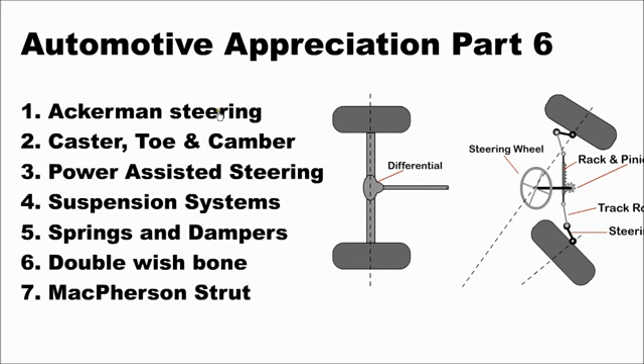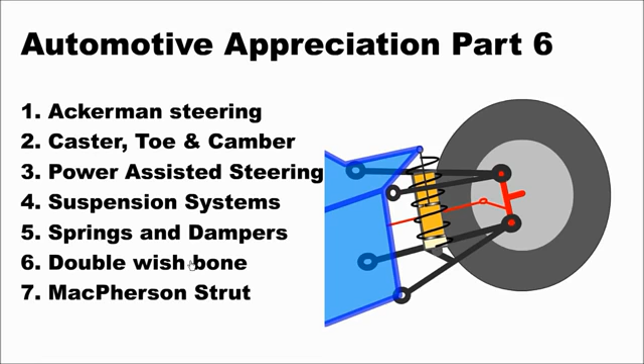In this course we cover the Ackermann steering, caster, toe and camber, power assisted steering, suspension systems, springs and dampers, double wishbone and MacPherson strut.

The Ackermann steering, designed in the 1800s by Rudolf Ackermann and still in use today, allows the outer front wheel to turn in a wider circle than the inside wheel. The steering wheel is connected to the rack and pinion, which moves the wheels via the track rods. The track rod is connected to the wheel with the steering arm.

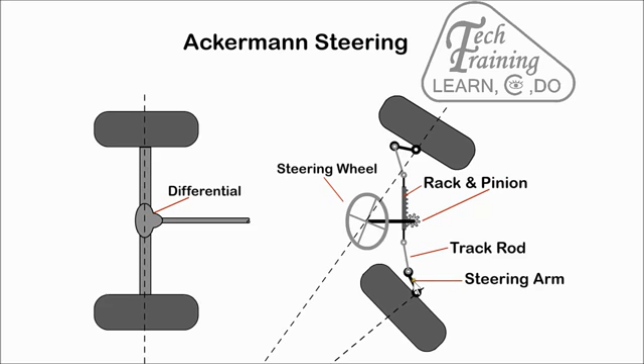A steering mechanism should be precise, provide feedback from the road, and should have a tendency to return to the straight ahead position after a turn.

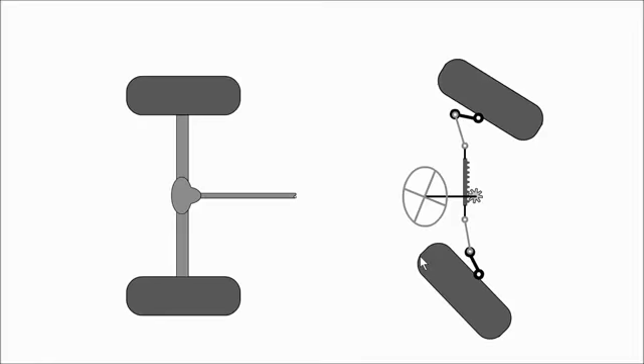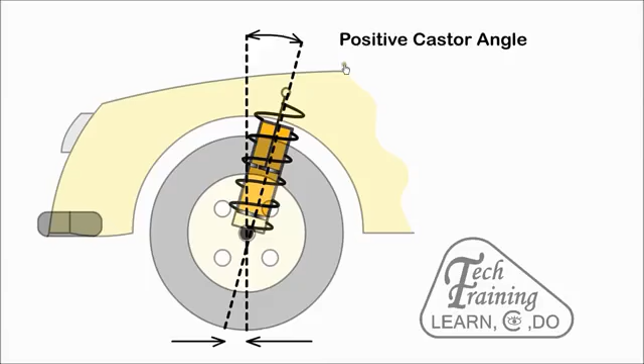Caster is the angle between a line extending through the steering pivot axis and a vertical line through the center of the wheel. When the steering pivot axis meets the road in front of the wheel contact point, it will result in an inbuilt tendency to travel in a straight line. With a tea trolley, the wheels always follow the direction in which the trolley is pushed. Most cars have positive caster.

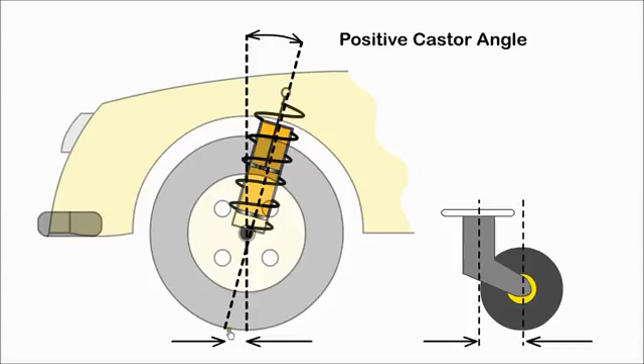When viewed from the front, the tilt of a wheel is called camber. If the wheels lean out at the top, it is called positive camber. With negative camber, the bottom of the tyre is further out than the top. This helps to improve cornering ability.

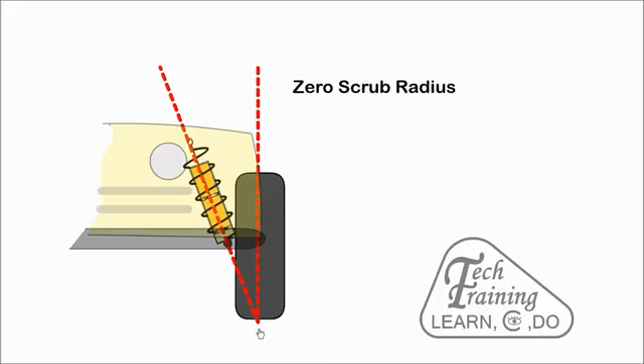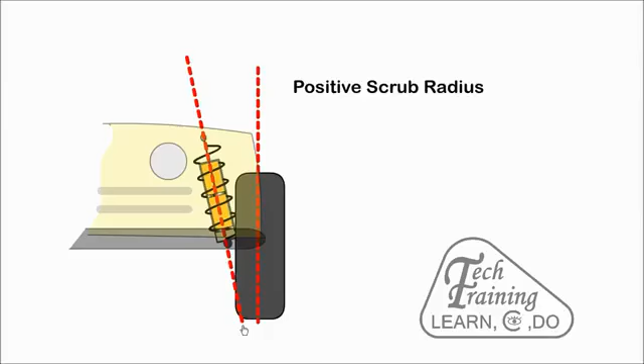Scrub radius is the distance between the steering axis road contact point and the center of the wheel. When both meet at the same axis, it is called zero scrub. When the steering axis point is towards the inside of the wheel, it is called positive scrub radius, and braking force on this wheel will tend to turn it outwards. When the steering axis point is towards the outside of the wheel, it is called negative scrub radius, and braking force on this wheel will tend to turn it in.

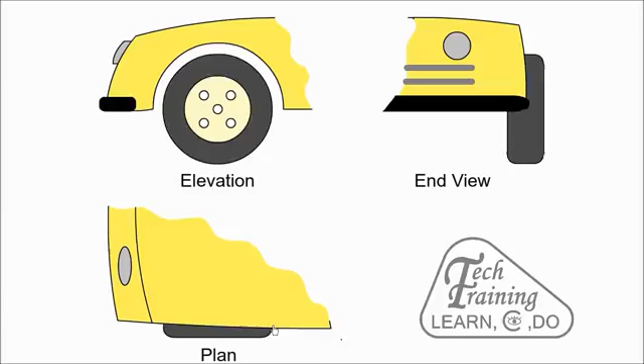Ideally, when a car is cruising on a straight road, the front wheels should be parallel. With toe in, the front of the wheels are set slightly towards each other. This is normally used on a back-wheel drive car. When the back wheels drive the car, the front wheels will tend to splay out or straighten as any slack in the steering system is taken up.

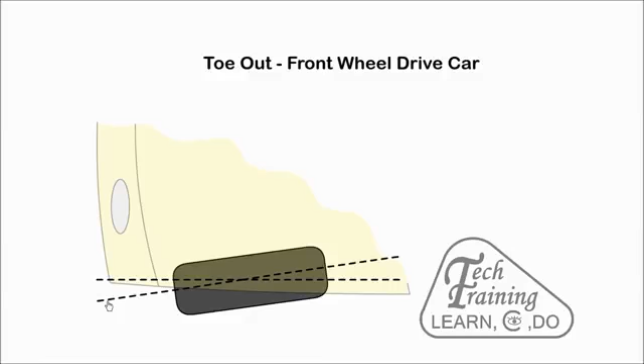With a front-wheel drive car, the wheels are set to toe out. When the engine drives the front wheels, it will tend to pull in and straighten the wheels. Correct wheel alignment ensures better fuel economy, tyres will last longer, and safer motoring.

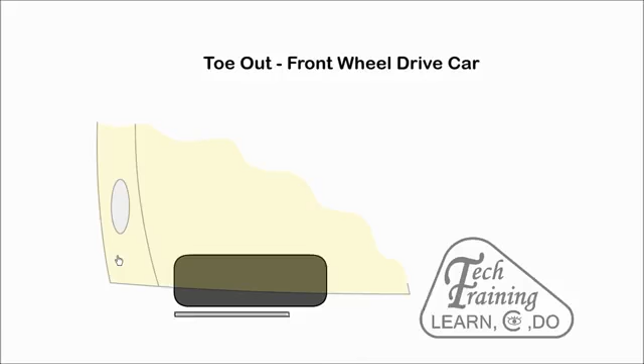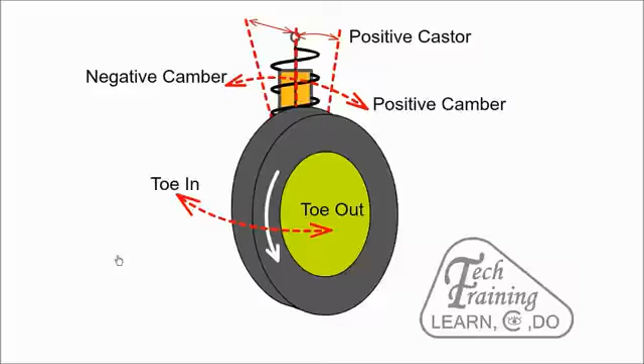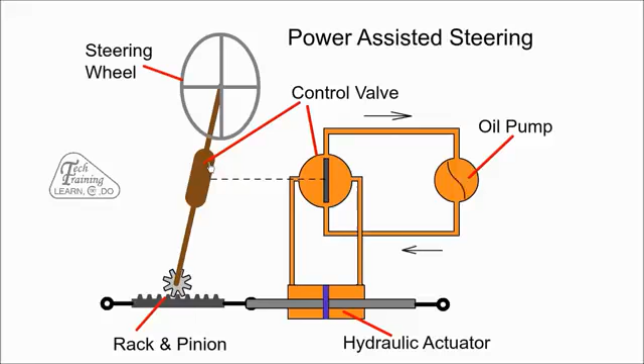With a hydraulic power steering, the hydraulic pump is driven by the engine and the power steering oil is directed to the actuator via the rotary control valve and hoses. When the steering is at rest, the fluid exerts an equal pressure on both sides of the piston.

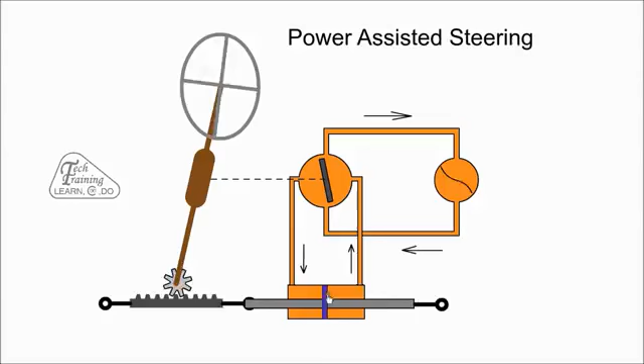When the steering wheel is turned, a torsion bar connected to a rotary valve diverts more oil to one side of the piston, providing assistance in that direction.

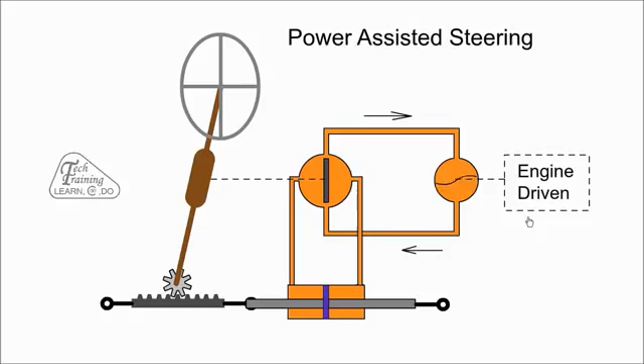Early power steering systems were belt driven by the engine, with the pump speed proportional to engine speed. Often this results in high pump speed when it is not required. It also reduces the power available for the driven wheels.

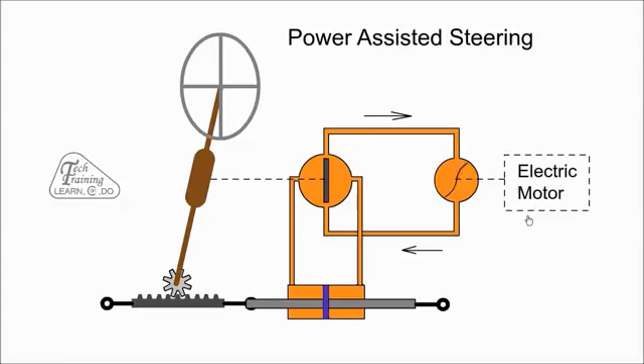With an electro-hydraulic system, an electrical motor is used to drive the hydraulic pump. When the pump is not required, the motor is switched off, saving power consumption. Another solution is a complete electric power assist system.

Electric power steering (EPS) uses an electric motor to provide assistance at low speed when the steering wheel is turned. It provides variable assist depending on vehicle speed, maximum assistance when stationary, and no assist at high speed. Since it only takes power from the battery when required, it will help improve fuel economy.

A rotation and torque sensor measure the rotation of the steering wheel and forward this data to the ECU. This information, together with road speed, determines the amount of assistance provided. On modern cars, the motor is usually connected directly to the steering column. This speed-sensitive electric system is also lighter and cheaper than the hydraulic equivalent.

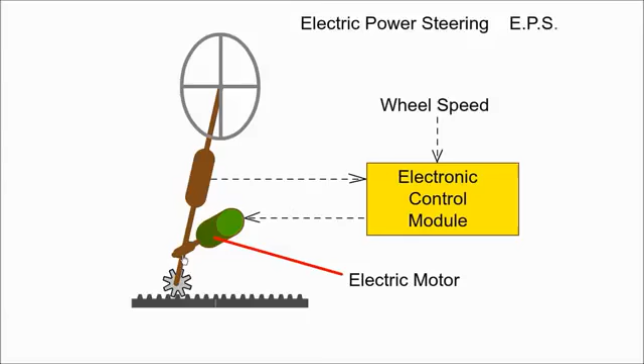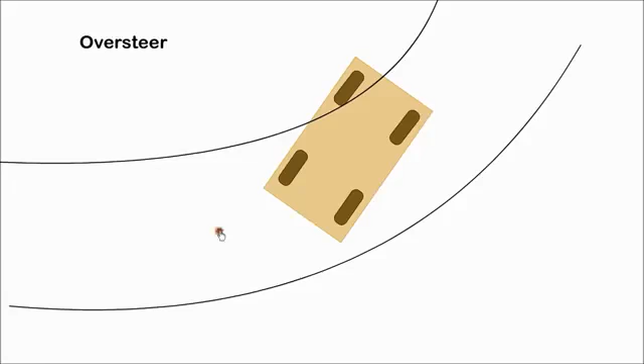Oversteer occurs when the back of the car swings out when cornering and can result in loss of control. It is corrected by reducing the steering angle. Understeering occurs when the front of the car slips out or runs wide. A small amount of understeer is more desirable than oversteer.

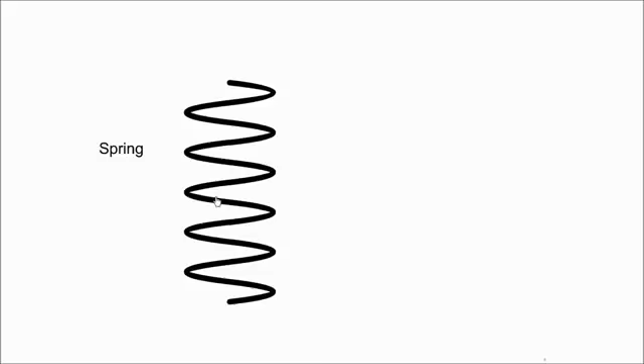Coil springs store and absorb shock energy by compressing and extending. When the wheel is pushed upwards by the bump, the spring prevents the shock from reaching the chassis and maintains the tyre in contact with the road.

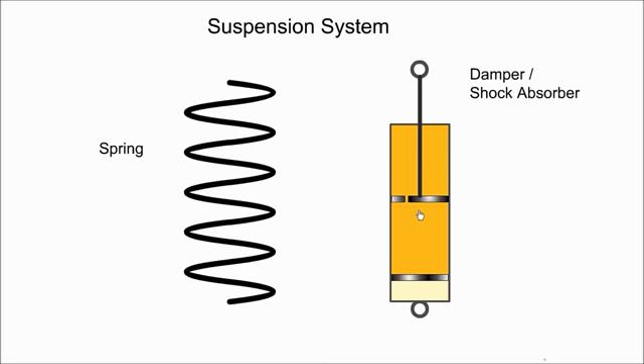A damper converts the oscillations of the spring to thermal energy. The damper is filled with oil. When the car hits a bump, the oil is forced through a small orifice, thus slowing down and damping the movement of the piston.

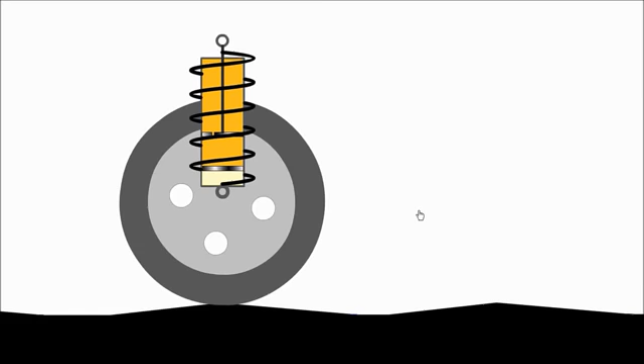The suspension consists of springs, linkages and dampers and connects the car with the road surface through the wheels and tyres. It provides comfort for the occupants and helps maintain the wheels in good contact with the road, providing traction, maintaining stability and reducing stopping distance.

A twin-tube damper has an inner and outer tube. The piston moves in the inner tube and hydraulic fluid is displaced to the outer tube. The restricted flow through the orifice slows down and controls the movement of the piston. Compressed air or nitrogen allows for the additional volume taken by the piston rod as it enters the cylinder.

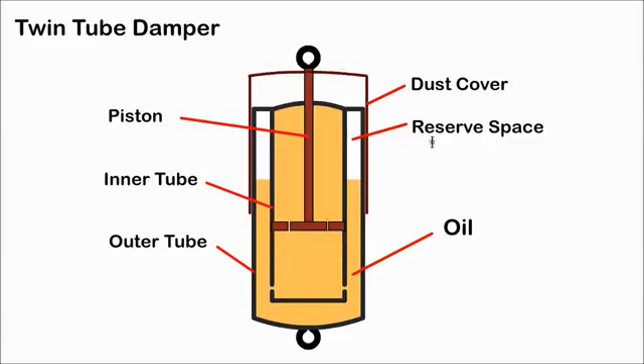A dead axle is not part of the drivetrain. The wheels are attached to it and it supports the weight of the vehicle. A live axle also drives the wheels and includes the differential. Leaf springs are made from layers of spring steel and are generally used on trucks.

A panhard rod is allowed to pivot at both ends. One end is attached to the car structure and the other to the axle. As the axle moves up and down, the panhard rod prevents lateral movement. They are common on trucks.

With an independent rear suspension, there is no axle between the wheels. The wheels can move independently of each other. Examples include trailing and semi-trailing arm.

With a trailing arm, each rear wheel is supported by an arm hinged to the structure of the car. There is no change in camber as the wheel moves up and down.

With semi-trailing arm, the mounting point of the car structure is offset at an angle. This allows the designer to alter the alignment and camber as the wheel travels over bumps.

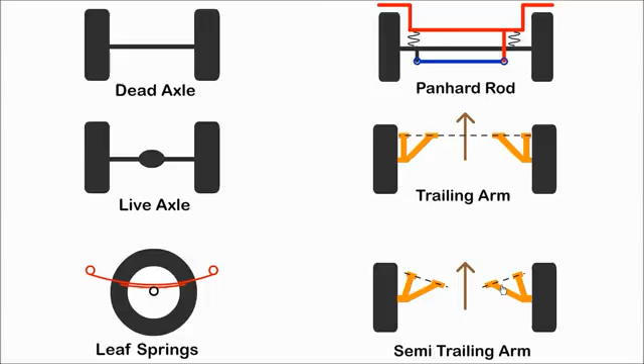An unsprung mass or unsprung weight is the mass of suspension components attached to the wheels. Ideally, the unsprung mass should be as small as possible compared to the sprung vehicle mass.

A dead axle or rigid beam axle uses a single piece of metal sprung beneath the vehicle, which the wheels are attached to. It has high unsprung weight. Also, the up and down movement of one wheel will also affect the other side, reducing comfort for the occupants. However, they are strong and have good load-bearing capacity, suitable for trucks.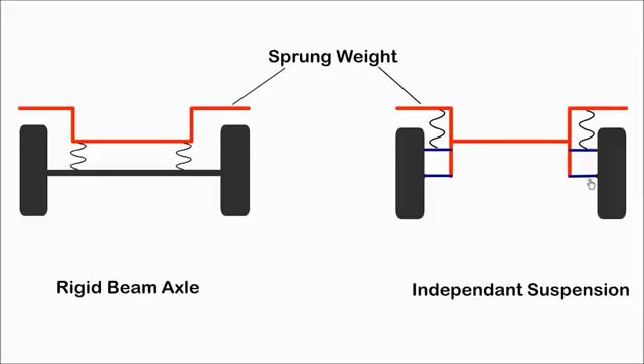With an independent suspension, each wheel is connected by its own linkage and its movement does not affect the other wheel. An independent suspension has less unsprung weight and allows the wheels to move independently of each other.

A double wishbone suspension has two wishbone-shaped links attached to the car at the wide end, and the narrow end is connected to swivel members which have the stub axle and wheel. The spring and damper are located between the lower member and the car structure.

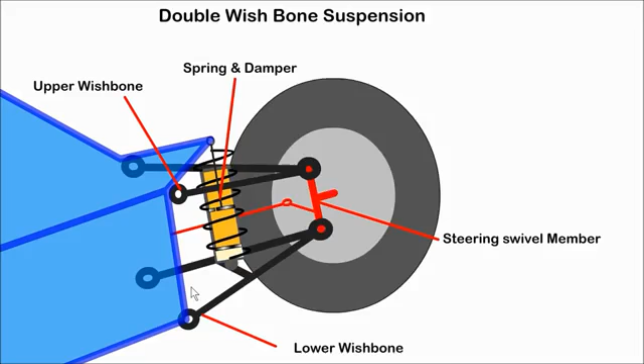In most cars, the wishbones are not of equal length or parallel. This system is expensive to manufacture but gives good stability to the wheel. They are often used on racing cars.

The wishbones can be designed to alter the camber of the wheel as the suspension is deflected. Negative camber provides better stability as the car corners.

The MacPherson strut has a telescopic strut anchored at the top by a flexible rubber mounting. The top mounting includes a bearing which allows the complete strut to swivel and steer the car. The transverse link is connected to the strut with a ball joint.

To absorb road shocks, a coil spring surrounds the strut, which also contains a damper. The MacPherson strut is mechanically simple, takes up less space, allows more space for the engine and occupants. It also has low unsprung weight. They require considerable vertical height, and the body has to be strong where the strut is attached.

A CV joint or constant velocity joint allows connection from the drive shaft to the wheel. It allows movement in all directions and is covered by a rubber boot to prevent ingress of dirt.

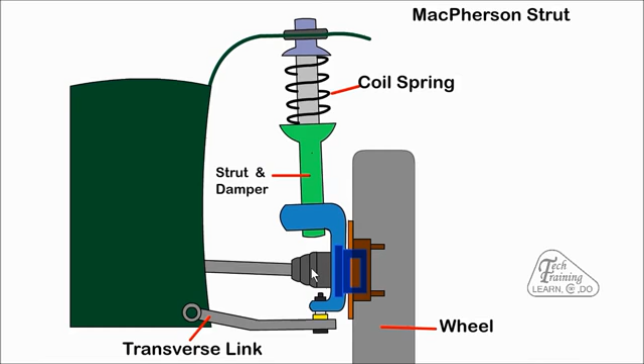When a car corners, the body tends to roll or sway. In this demo, we have omitted the springs and dampers for clarity.

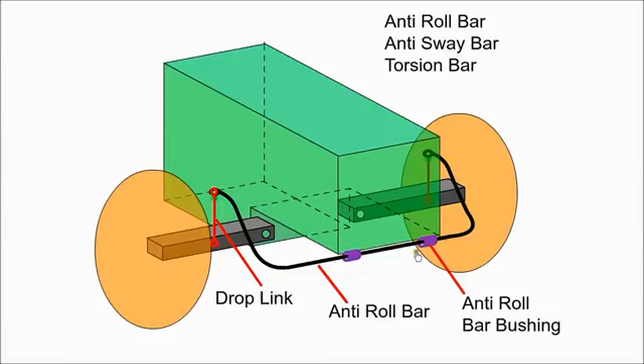An anti-roll bar, sway bar or torsion bar connects left and right side suspension to each other. As the suspension is compressed on one side, it exerts a twisting force on the torsion bar, transferring some of the load to the other wheel, reducing body roll.

Most cars have a front anti-roll bar, while sports cars may have one front and back. Obviously, if both sides of the suspension are connected together, we no longer have an independent system. A stiff bar reduces body roll, but too stiff can limit the operation of the independent suspension and cause the inside tyre to lift. Often a compromise is required.